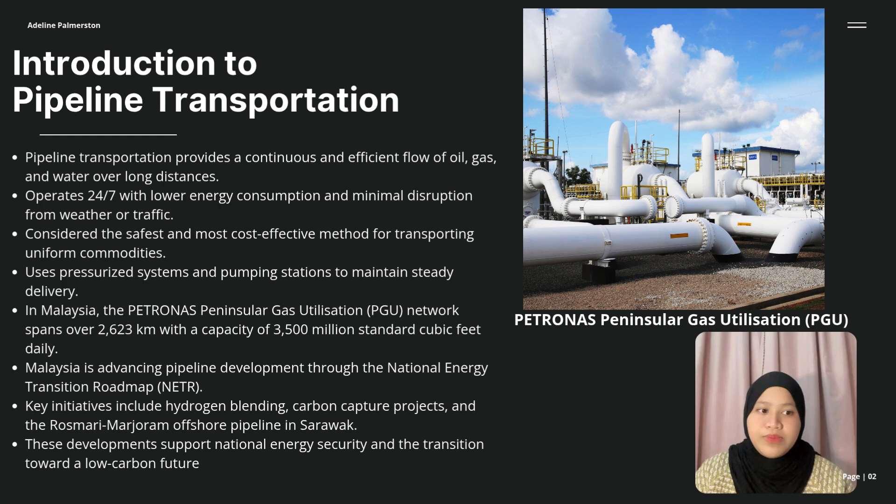feet daily. Malaysia is advancing pipeline development through the National Energy Transition Roadmap (NETR), and the key initiatives include hydrogen blending, carbon capture projects, and also the Rosmari-Marjoram offshore pipeline in Sarawak. These developments support national energy security and the transition towards a lower carbon future.

Okay, now I'll explain about the characteristics of pipeline transportation. I'll explain 5 characteristics. The first one is continuous operation. We all know that pipelines operate 24/7 with minimum human intervention to ensure a stable supply of resources through networks in Malaysia like the PGU system.

The second one is high volume capacity. Pipelines transport massive amounts of oil, gas, and water daily. It supports facilities such as Pengerang Integrated Complex (PIC) while reducing road congestion.

The third one is high initial but lower operating costs. Pipeline construction requires high capital investment, but long-term operating costs are lower due to automation and energy efficiency.

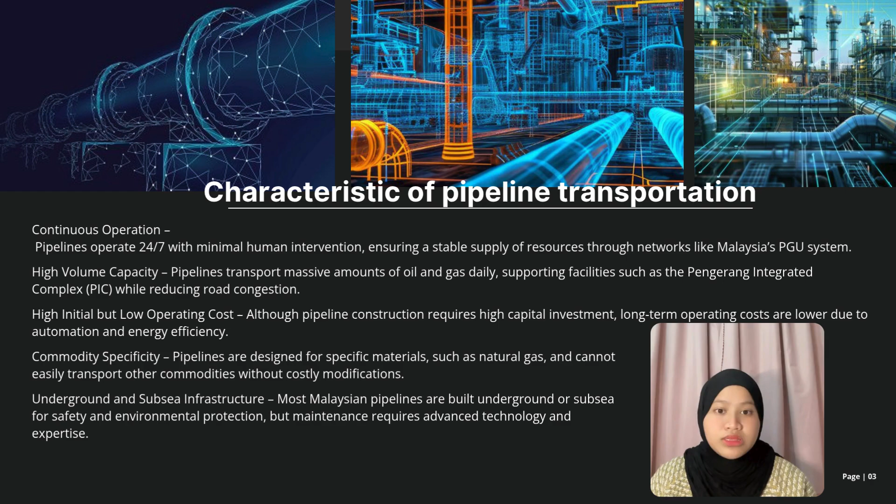The fourth one is commodity specificity. Pipelines are designed for specific materials such as natural gas and cannot easily transport other commodities without costly modification. So the last one is underground and subsea infrastructure. Most Malaysian pipelines are built underground or subsea for safety and environmental protection, but maintenance requires advanced technology and expertise.

Now, let's move to the advantages and disadvantages of pipeline transportation. First, let me talk about the advantages. We have 4 advantages of pipeline transportation. The first one is it provides a continuous and reliable flow of resources without interruption from traffic and the weather. We all know that the advantages and the characteristics are quite similar: pipelines work 24/7 regardless of the weather and traffic congestion.

The second one is low operating costs and high efficiency, which we already talked about in the characteristics. Although the construction of a pipeline requires a large initial investment, the operational costs are relatively low because once the system is established, it doesn't need much more investment.

The third one is it's highly energy efficient compared to other transportation methods. It consumes less fuel and produces lower carbon emissions per ton-kilometer. The last one is enhanced safety when transporting hazardous material. Since many pipelines are installed underground or subsea, the risk of accidents such as spills and leaks is lower compared to road and maritime transport.

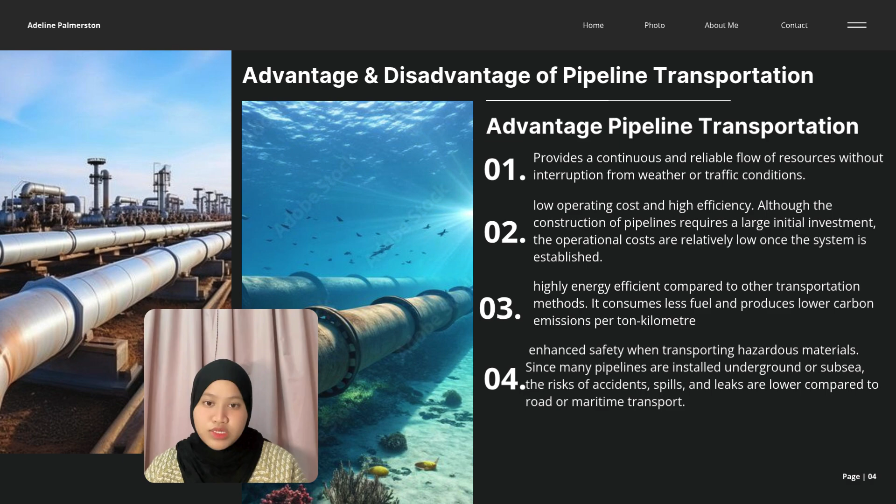I'll explain the disadvantages of pipeline transportation. We have 5 in total. The first disadvantage is high capital investment, because the construction process, land acquisition, and installation of safety systems are extremely expensive. That is why pipeline transportation requires high capital investment, which is a disadvantage of this transportation.

The second one is inflexibility. Why do we say so? Because it is specifically designed to transport only one commodity at a time, such as gas, oil, or water, which limits its versatility compared to other transport systems.

The third one is leakage and environmental risk that may cause serious damage to both nature and human life. Problems such as corrosion, operational faults, and illegal tapping can lead to spills and also explosions of pipelines.

The fourth one is security and safety concerns associated with pipeline transportation. Pipelines are vulnerable to sabotage, theft, and vandalism because many of them are located in remote or isolated areas that are difficult to control and monitor all the time. The last one is regulatory and cross-border complexity.

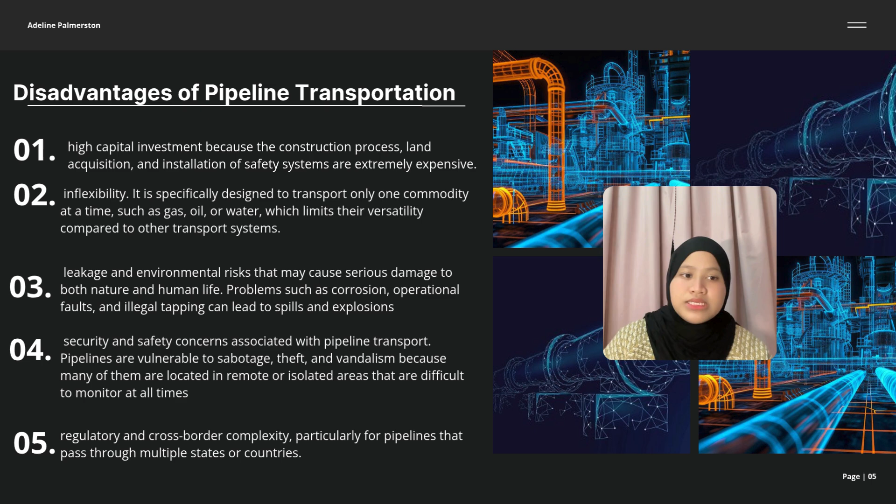Because particularly for pipelines that pass through multiple states and countries. So now I'll talk about the infrastructure and also network of pipeline transportation in Malaysia. So, the pipeline network in Malaysia transports natural gas, water and petrochemical products across different regions.

The Petronas Gas Berhad Peninsula Gas Utilization (PGU) system is one of Malaysia's biggest pipeline networks. Commissioned in 1984 and expanded through 4 phases to meet increasing energy demand. It transports processed natural gas from Kerteh, Terengganu to major demand centers in Peninsular Malaysia. It covers approximately 2,500 kilometers with a capacity of 2,000 million standard cubic feet per day.

It connects to states such as Terengganu, Pahang, Selangor, Negeri Sembilan, Johor and also Penang. The supply goes to Tenaga Nasional Berhad (TNB) power plants and also industrial zones including Pasir Gudang, Gebeng and Shah Alam. It is also linked to the Singapore Gas Transmission System (SGTS) for gas export activities.

The Sabah Sarawak Gas Pipeline (SSGP) is a 512 kilometer pipeline connecting Kimanis, Sabah to Bintulu, Sarawak. It also supports LNG processing and domestic gas supply in Malaysia. It faced technical and security challenges due to the remote terrain conditions.

The Trans-Sabah Gas Pipeline (TSGP) was planned to connect Kimanis, Sandakan and Tawau through a 500 kilometer pipeline. The project was delayed due to terrain difficulties and high costs and is currently still under review. Malaysia also operates water and petrochemical pipeline systems. The Langat 2 water supply project uses a 67 kilometer pipeline to supply treated water between Selangor and Negeri Sembilan.

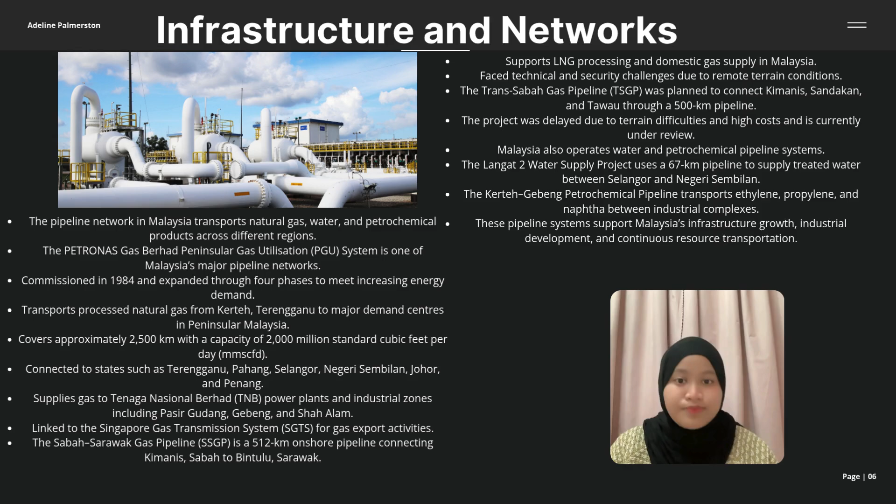The Kerteh Gebeng petrochemical pipeline transports ethylene, propylene and naphtha between industrial complexes. These pipeline systems support Malaysia's infrastructure growth, industrial development and continuous resource transportation. Now, let us talk about the policies and regulations related to pipeline transport.

So, for the policies and regulations related to pipeline transport, the Petroleum Development Act 1974 (PDA) grants Petronas exclusive rights to explore, develop and transport petroleum resources in Malaysia, and regulates pipeline construction and operation while ensuring environmental and safety compliance. The Gas Supply Act 1993, Amendment 2016, regulates the gas supply industry and third-party access (TPA) to pipeline infrastructure. The Gas Supply Licensing Regulation 2017 promotes open access, competition and reliable gas distribution.

Now we'll talk about national energy and environmental policy. The National Energy Transition Roadmap (NETR 2023) aims to decarbonize Malaysia's energy sectors by 2050. It encourages the use of pipelines for hydrogen transport and carbon capture, utilization, and storage (CCUS), and supports the reuse of existing pipelines for low carbon fuels.

The Environmental Quality Act 1974 (EQA) requires an environmental impact assessment (EIA) for major pipeline projects. The Occupational Safety and Health (CIMAH) regulation ensures safety management, emergency response, and staff training for hazardous operations. Now, we'll talk about new pipeline policy.

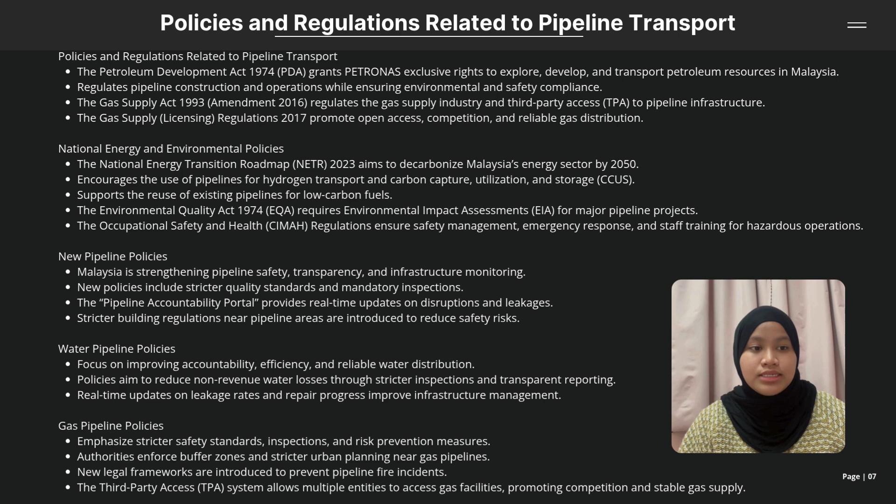Lastly, we'll talk about gas pipeline policy, which emphasizes stricter safety standards, inspection, and risk prevention measures. Authorities enforce buffer zones and stricter urban planning near gas pipelines. New legal frameworks are introduced to prevent pipeline fire incidents, such as what happened in Putra Heights, and also the third-party access (TPA) system allows multiple entities to access gas facilities, promoting competition and also stable gas supply.

Okay, now I'll talk about the issues related to pipeline transportation. Pipeline leakage can happen due to corrosion, aging pipelines, equipment failure, and poor maintenance. Leakage may pollute rivers, soil, and nearby residential areas. Gas pipeline accidents can cause fire, explosion, toxic gas exposure, injuries, and property damage. Supply disruption may affect industry and Malaysia's energy sector. Urban development near pipeline routes increases safety risk.

Construction, housing, and illegal excavation can damage underground pipelines. A weak monitoring system and low public awareness make accidents harder to prevent. Malaysia's tropical climate, heavy rainfall, flooding, and humidity accelerate pipeline corrosion and deterioration. Offshore pipelines face seawater corrosion and difficult maintenance conditions.

Pipeline maintenance and infrastructure upgrades involve high costs. Companies must invest in technologies such as leak detection and pressure monitoring systems. Regular inspection, maintenance, and emergency response plans are important for safety.

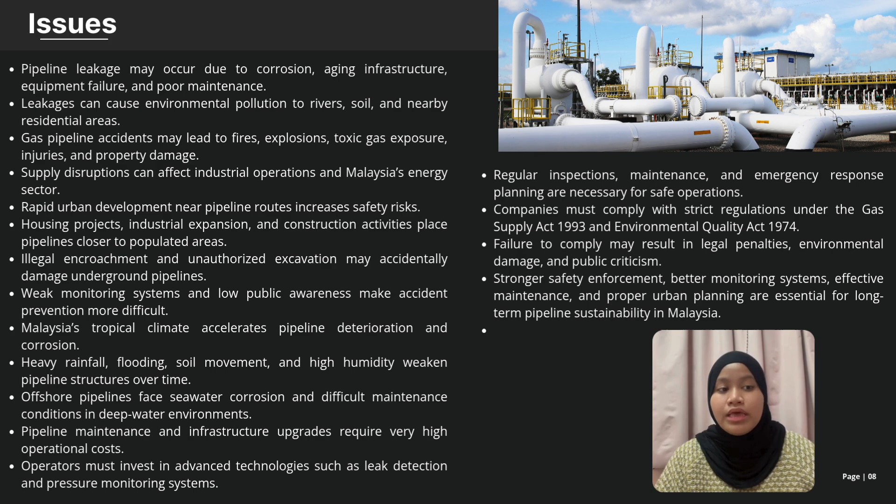Companies must comply with the Gas Supply Act 1993 and Environmental Quality Act 1974. Failure to comply may lead to legal penalties, environmental damage, and also public criticism. Stronger safety enforcement, better monitoring, effective maintenance, and proper urban planning are needed for long-term pipeline sustainability in Malaysia.

Let's move to the stakeholders for pipeline transportation. Government agencies such as the Ministry of Transport (MOT), Energy Commission, DOSH, and DOE regulate pipeline safety, environmental protection, and also operational systems. Major operators like Petronas and Gas Malaysia manage pipeline operation, maintenance, monitoring systems, and infrastructure development, while consumers and industry rely on pipelines for a stable supply of natural gas, petroleum products, and electricity generation.

Environmental groups monitor environmental impacts such as oil spills, gas leakage, pollution, and deforestation caused by pipeline activities. Community organizations and local residents near pipeline areas raise concerns about safety risk, land use, and environmental protection. Cooperation among government agencies, operators, consumers, environmental groups, and communities is essential to ensure safe, efficient, and sustainable pipeline transport

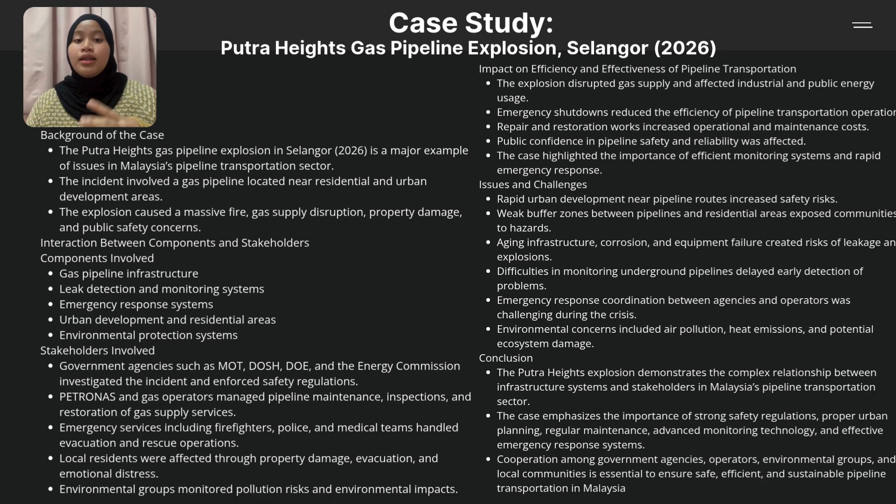in Malaysia. Lastly, I'll talk about the case study of the Putra Heights gas pipeline explosion in Selangor in the year 2026. So what is the background of the case? The Putra Heights gas pipeline explosion is a major example of issues in Malaysia's pipeline transportation sector. The incident involved a gas pipeline located near residential and urban development areas. The explosion caused a massive fire, gas supply disruption, property damage, and public safety concern.

What is the interaction between the components and the stakeholders in this case study? The components involved are the gas pipeline infrastructure itself, the leak detection and monitoring system, the emergency response system, urban development and residential areas, and also the environmental protection system. Who are the stakeholders involved?

Government agencies such as MOT, DOSH, DOE, and the Energy Commission investigated the incident and enforced safety regulations. Petronas and gas operators manage pipeline maintenance, inspection, and restoration of gas supply service. Emergency services, including firefighters, police, and medical teams, handled evacuation and rescue operations. Local residents were affected through property damage, evacuation, and emotional distress, while environmental groups monitored pollution risk and environmental impact.

What is the impact of this case on the efficiency and effectiveness of pipeline transportation? The explosion disrupted gas supply and affected industrial and public energy usage. Emergency shutdown reduced the efficiency of pipeline operation. Repair and restoration work increased operational and maintenance costs, and affected public confidence in the transportation. The case highlighted the importance of efficient monitoring systems and rapid emergency response.